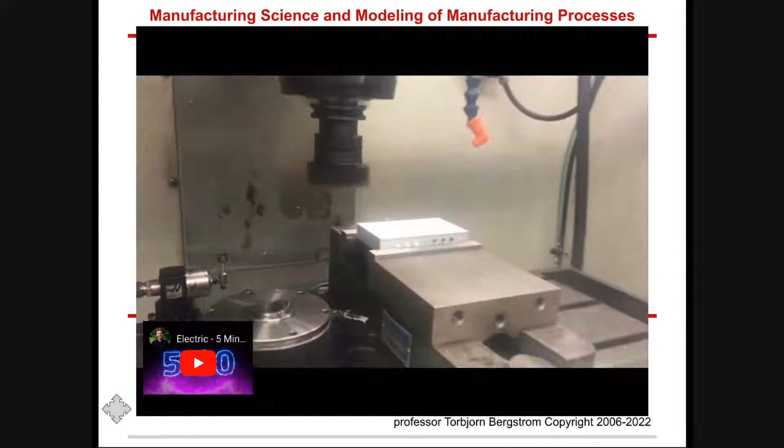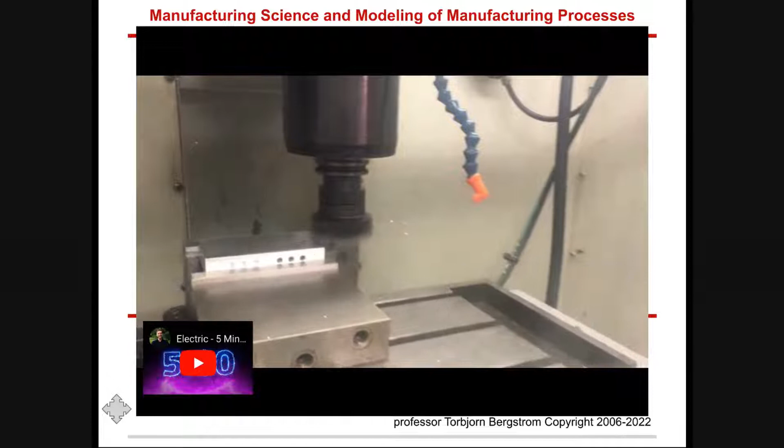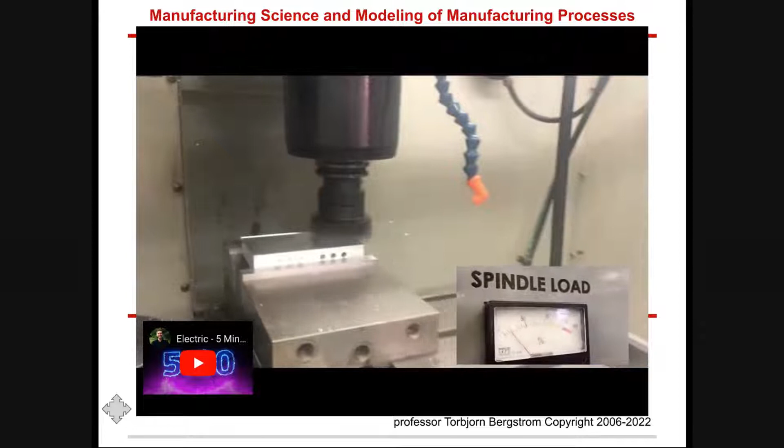So, who remembers the Geico commercial with the camel walking through the office? Yeah, it's Hump Day, right? So this is Hump Week. You know that, right? It was the middle of the term, and what I love is that it's Wednesday all week long. Didn't you know that? This is a national holiday. It's Wednesday week.

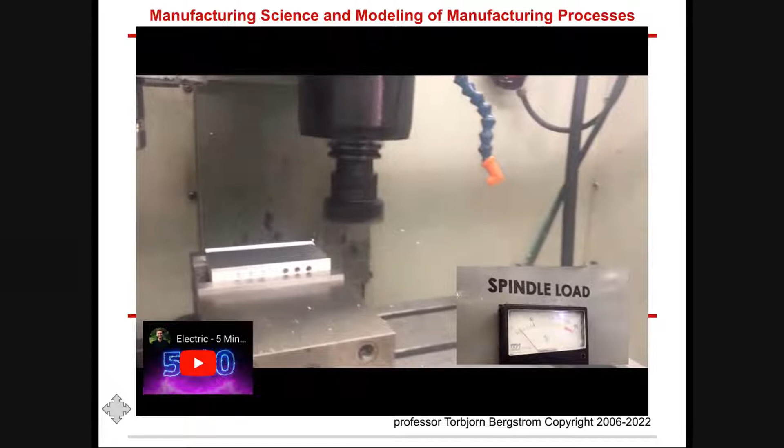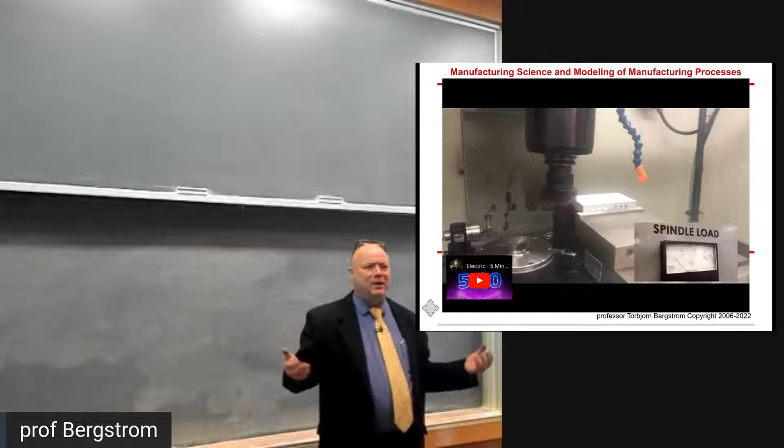So here's the thing. People lament Hump Day, right? People lament Wednesday because they're thinking, how many more days till the weekend? 2.5 days till the weekend, depending on when the weekend starts.

But if you think about it this way, tomorrow will be a lecture you don't want to be away from. You want to be here tomorrow for lecture. Tomorrow's going to be memorable. Not like blonde wig memorable, but it'll be memorable.

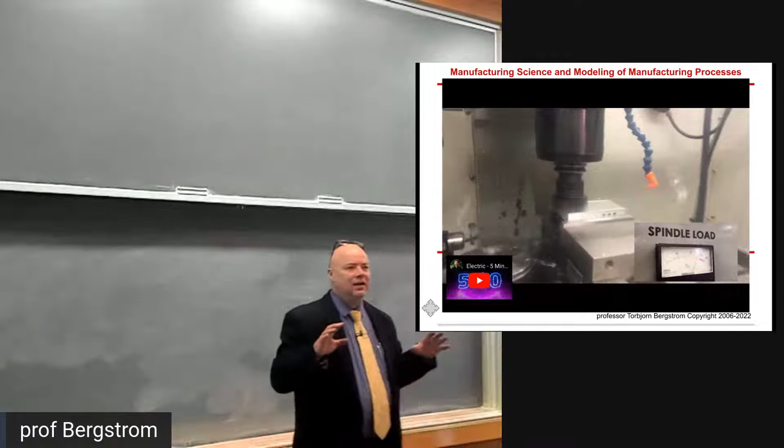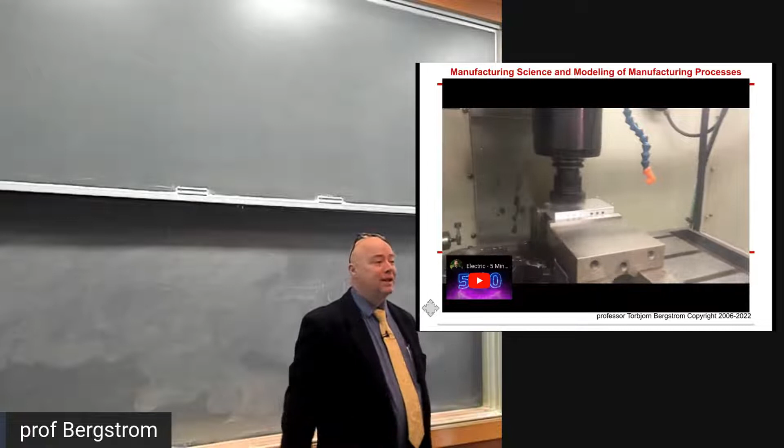So when you're sitting on Hump Day, in the middle of the week, that means you can look back on the week that was, and look forward on the week yet to be, and do all the stuff you were supposed to already have done. My favorite part about Fridays is that there are 2 working days left before Monday. All right, anyway.

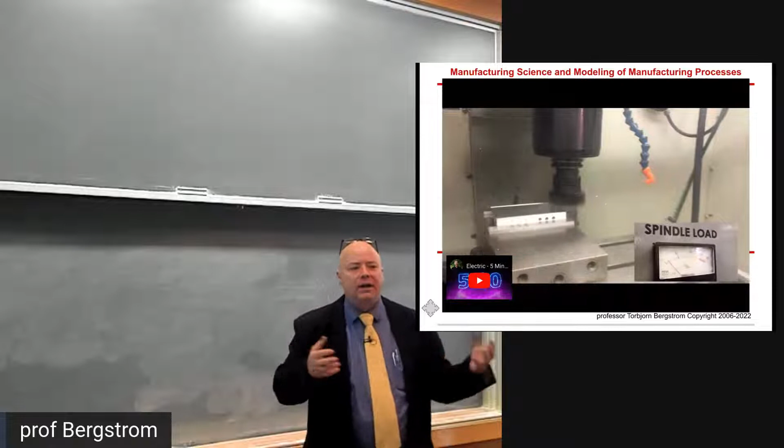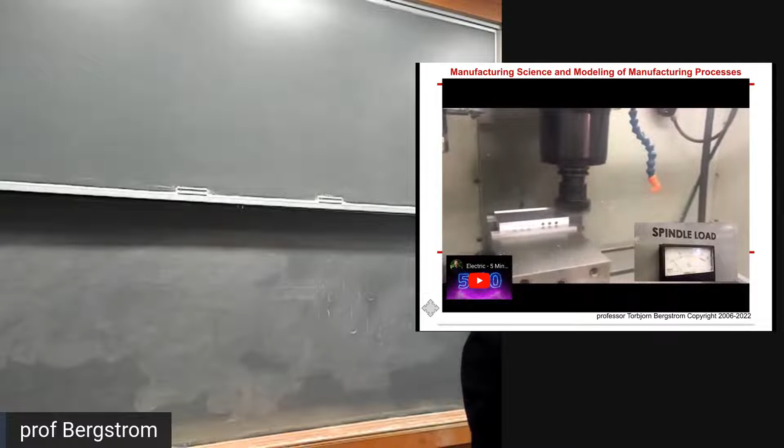So this week we're gonna talk about modeling manufacturing processes. As engineers, why do we want to model manufacturing processes? Go ahead. Because it's cheaper than doing them not modeled.

So we do, prior is correct. We do modeling in any situation. Prior is correct, he was correct. In any situation, we do modeling so that we don't have to waste time doing the actual thing, right?

I mean, I guess there is the situation where we're doing modeling, like who used to build model airplanes or whatever when they were a kid? You smell the glue when you're gluing the stuff together. Anybody? 1, 2, really not more than that? Everybody got one as a gift though as a kid, because there's always an uncle that's like, this kid's going to be an engineer, this kid needs a model airplane, right? There's always that uncle. Anyway, so that is kind of like modeling, but that's not the kind of modeling we're talking about.

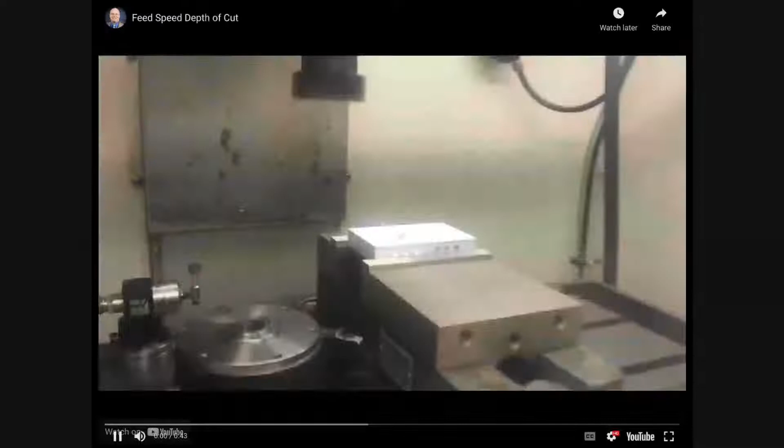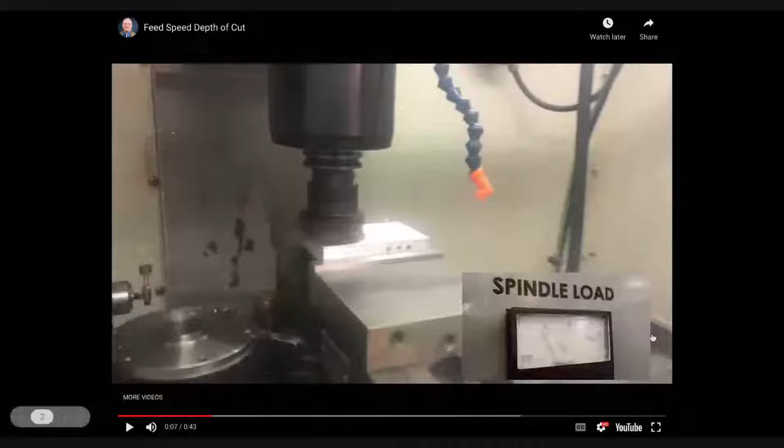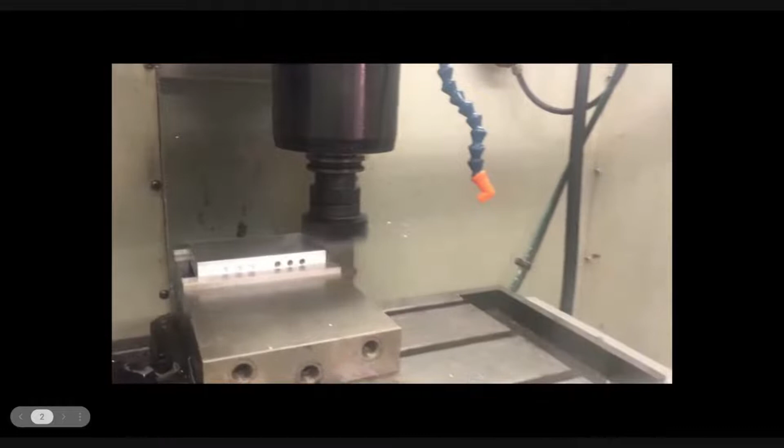So when you're at the machine tool, you can see there's a meter telling you how much power is being used by the machine at this moment. What we've kept the same is the tool - the tool geometry is the same, the tool material is the same. Keep an eye on that spindle load meter.

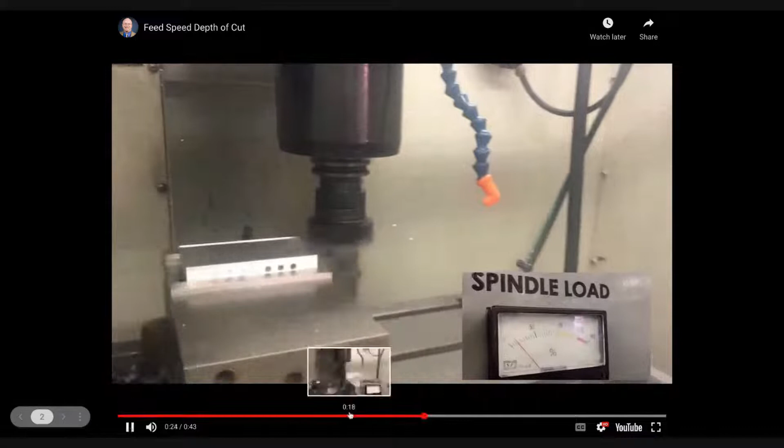So where was it for the first pass? About right about where it is right now, where I stopped it, because it was just leaving the part. Let's look at this first pass - it's about halfway between 0 and 50%, turns out.

Then we do the second pass here - it's about halfway between 50%, maybe a third of the way between 50% and 100%. And with this third pass, it's up at about 150%.

And so that was the power consumed by the machine tool to spin that cutting tool as it was feeding through the workpiece material. The only thing that changed between the three operations was the incremental depth - that axial depth of cut was increased between those three operations.

And so you can imagine, if the people at home heard this - and if we didn't have so much feedback here, you guys could have heard it too - but when you do get home, click on the lecture notes and listen to that video. What you would have seen or heard is...

So is that electrical power? That's electrical power that's going to the machine. Yeah, that's really easy for us to measure because we have a voltmeter and an amp meter, right? So we can measure the electrical power going to the machine at the moment when we're cutting. Super easy to measure.

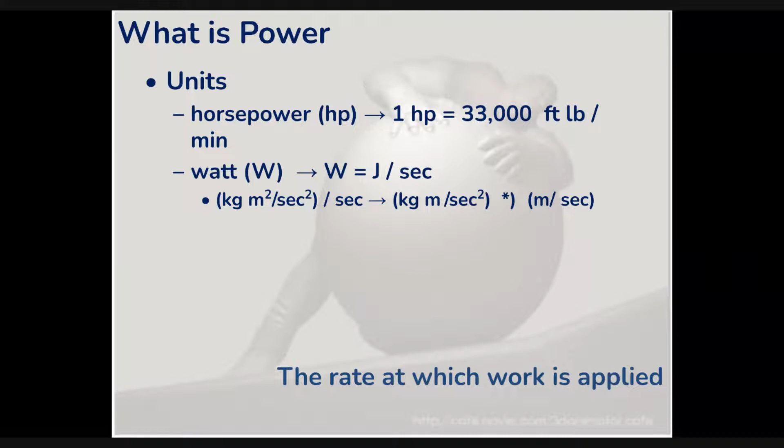Power equals force times velocity. So remember, power depends on material removal rate, what material you're cutting, the feed, how sharp the tool is. That's pretty much what it depends on.

There's actually a little fudge factor we put in. When you make a mathematical model, how do you know your model's any good? Because it reflects what actually happens. But when you make a model, you have to do an experiment to validate it.

When you consistently find that your model's sort of right but a little bit off to the side, how do you fix it? You add what we call a fudge factor in engineering. We just make up a number that shifts us back to where we thought we were supposed to be.

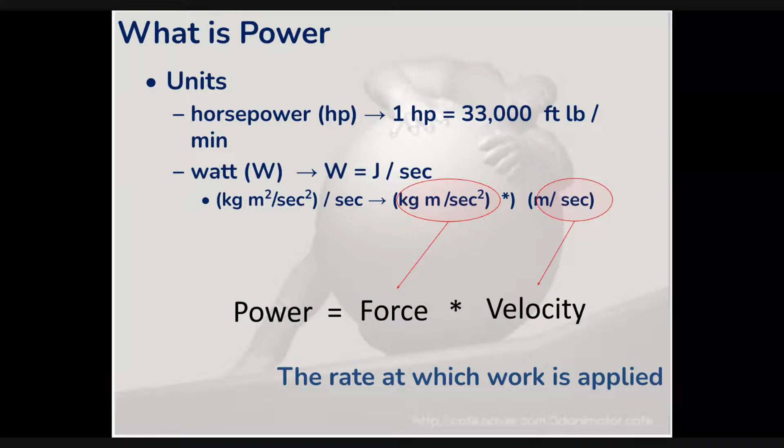Yeah, we got this part. Yeah, we did that. Looked at that. All right.

So to do these kind of estimates, we're going to use the Machinery's Handbook. You can get it from the library, which is why I didn't make you buy the $160 book. There's a little video here that shows you how to get it from the library.

It's electronic, so everybody can look at it at once, and there's a little video that shows you how to get access to it. The example in my slides is from the 28th edition of the book. I think the 31st or 32nd edition is the most currently published, but this math hasn't changed—you can use the 28th edition.

In fact, the oldest one I have is the 7th edition on a bookshelf in my office. This math hasn't changed going back that far because it's physics. Now, the quantity of information may have changed since then.

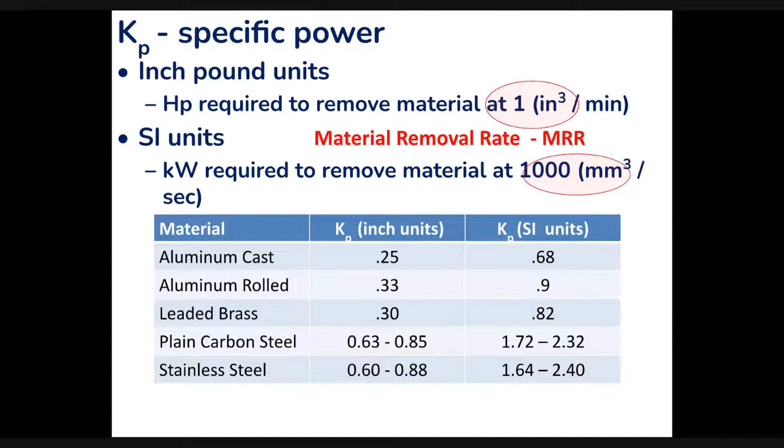So what they've done is told us we need to know about the material. They've done a whole bunch of tests with a whole bunch of different materials, and told us what factor to use depending on which material we have. So if we know we have aluminum, we know this is our specific power for cutting aluminum.

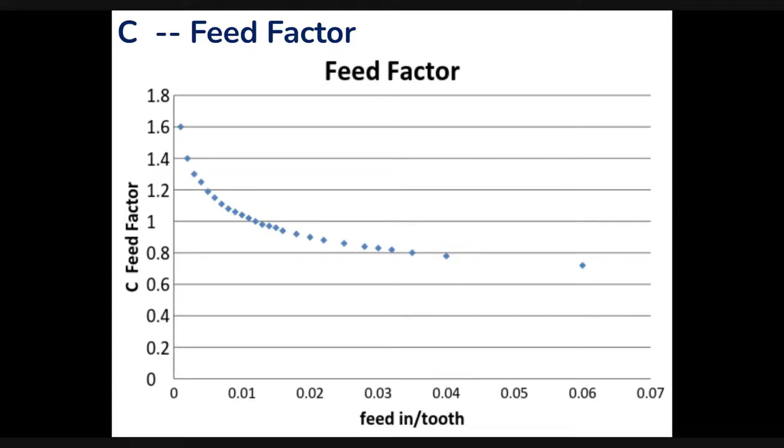Now here's our fudge factor, this feed factor. Depending on what your feed in inches per tooth is, you're either going to be a little bit less than what you wanted or a little bit more, but you can plug this in. The material removal rate, we talked about this.

The tool wear factor—depending on what type of machining you're doing, they've done thousands, probably tens of thousands, maybe hundreds of thousands of experiments to build up this database that we're going to get for free. Well, it's not really free—it costs you like $65,000, but it's included with your tuition.

From the Gordon library. Depending on what operation you're doing, if the tool is sharp, use a factor of 1. If the tool is not sharp... how do you know if the tool is sharp or not? You could touch it, be careful.

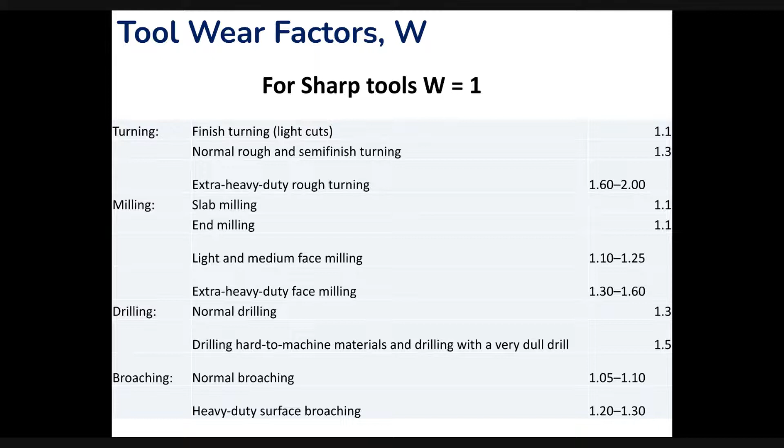It kind of depends on why you want to do the estimate. Just assume the worst case scenario for the thing you're trying to look up. If you notice that the tools are breaking, it may be because they're becoming not sharp—because when they become not sharp, the power goes up, the force goes up. So assume the worst case.

So you can get the power of cutting by multiplying that KP factor by C, by the fudge factor, by the volumetric material removal rate, by this tool wear factor.

When you go to the Machinery's Handbook, there's going to be a KP to use if you're using metric units, and a KP to use if you're using imperial units. Make sure you use the right one. We have some really bad quiz questions that mix the units—I'll give you like inches and kilograms.

It's really because I'm an idiot, not because I was trying to be a pain in the ass. But I went with it because engineers should be able to figure out what the units are. So pay attention to the units. I tried to fix all those, but I'm sure some of them have slipped through.

You have to use the Machinery's Handbook to know what these numbers are, except for a few of the questions that you could pick off these slides in this presentation.

So what you'll note in this equation is it doesn't say speed, right? There's no velocity. The Q involves the feed rate, the depth of cut, and the width of cut. It doesn't involve the speed. Those are independent - you get to pick both when you're setting up the thing. But didn't we say at the beginning that power equals force times velocity?